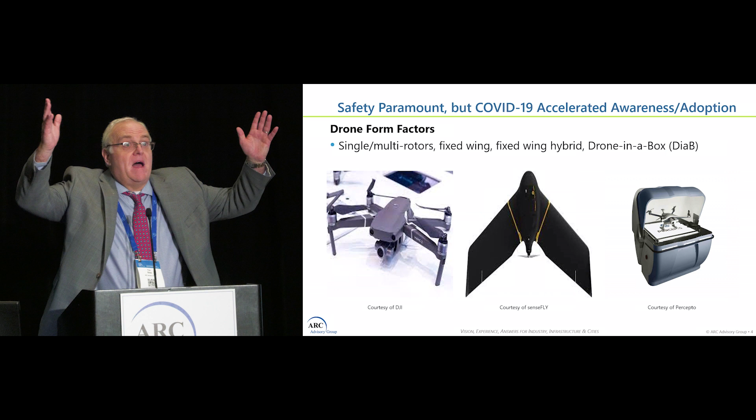Since the focus here is on drones, these are some examples of the different types. You've got the predominant share of the market, based on our research, which is the multi-rotor type drone on the left. Then there's your fixed wing one in the middle, and a growing area of interest is these drone-in-the-box solutions operated autonomously. You see the enclosure - it's usually weather-proof, has a charging setup inside, and communications capabilities. It opens up, the drone flies a pre-programmed mission, returns, and most can self-charge and prepare for the next mission.

I think that's going to be a real growth area, because with advancements in autonomous technologies that may be used for vehicles, we're going to see a lot of activity. The drone is really becoming a mobile inspection platform - same with robotics - because you're adding intelligence analytics, whether edge or cloud computing or both. That's where I think the future is going to be.

In many cases the drone will perhaps serve as an advisor, but we have the great crew change going on in the various process industries. So if companies are challenged to find personnel, these technologies will be able to replace them. But the number one driver, as I mentioned, is safety - not having someone go into a nuclear power plant or electrified substation area, or climb a 300-foot flare stack. So those are the applications where we see this: remote locations, emergency response for electric power providers. COVID kind of accelerated this whole push towards remote operations, and increasingly companies are looking at autonomous operations, and I think drones and robotics will play a role.

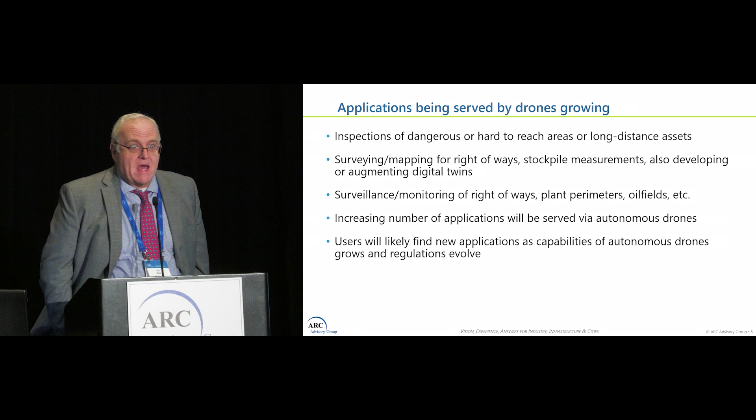Applications, as I mentioned, the hard to reach or dangerous type applications are the initial drivers of people investing in drones and robotics. But some of the major applications you'll see are inspections. It could be thermal, on a utility line or something like that. It could be surveying, mapping, inspections of going around perhaps a refinery or an offshore platform, doing various inspections. Those are some of the key applications we're going to see.

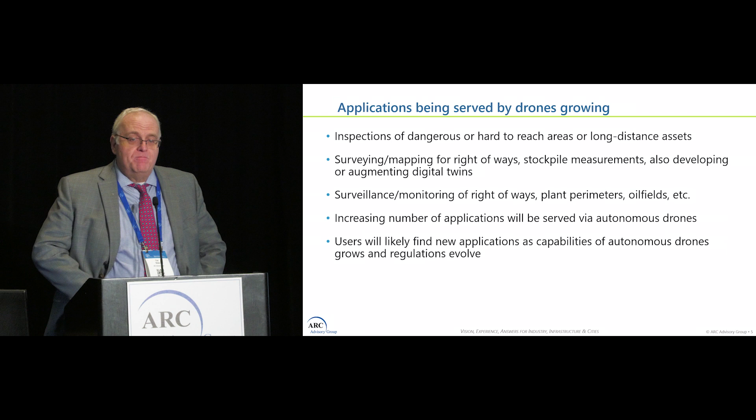Stockpile measurement and mining and things like that. And obviously, using these tools to develop things like digital twins. I think you can go out and use these drones to create a digital twin of an offshore platform or whatever the case may be. I think that's going to be an area where we're going to see a lot of interest and demand for that type of technology.

I think as adoption increases, the two major hindrances are battery technology primarily, and regulatory aspects that the FAA and other countries have with their own respective avionic regulatory aspects. We're seeing some progress with the FAA. They move slower than most people would like, but they're moving towards companies trying to push for type certifications. If you're familiar with the drone situation, you've got visual line of sight, which requires you to always be in visual contact with the drone.

You may have to have spotters either on the ground or in planes, or beyond visual line of sight, where you can fly beyond the visual line of sight, but only at certain altitudes. In many cases you have to have an observer or things like that.

So those BVLOS waivers that you apply for - say if the FAA receives 100, my understanding is they've approved less than 4%. And most of those are utilities used for emergency response. BP was an early adopter - they got approval to use these on the North Slope. Of course, there's no one there but moose and bears, so there's not a real threat of these things crashing into human beings.

That's one of the concerns the FAA has - the various regulations around flying at night, flying over people. So they're working together with the suppliers to advance these regulations. And as that happens, I think you'll see greater adoption in the U.S. and other countries across the world.

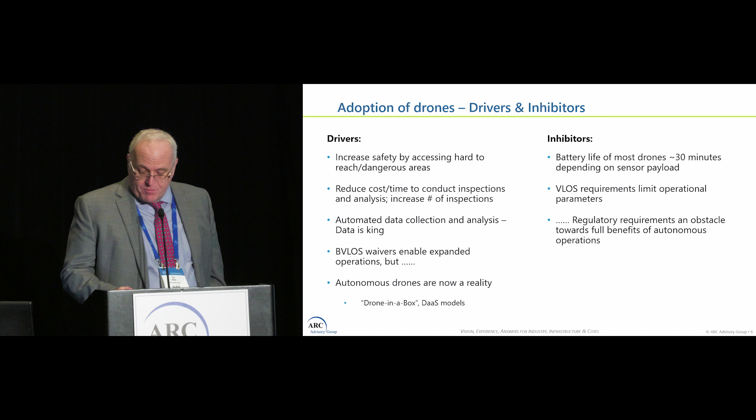Obviously, when we did our research, we tend to be a little more conservative. I've seen a lot of these different studies about the drone market being so big and growing so fast. And I start talking to these guys, and they say, well, where are all these drones? Because I know there's only so many refineries across the world, and then you find out that a lot of these numbers are highly inflated. So when you get down to it, my belief is that there is a drone market out there today, but it's a lot smaller than people think - though I think there's room for opportunity.

I think that's going to be a reflection primarily of less restrictive requirements from FAA and other organizations, opening up the envelope to allow greater mission capabilities. There's also a great crew change happening—a lot of folks with gray heads and domain experience are retiring, and there's a challenge recruiting younger generations. I think drones can help fill that gap.

I expect to see them becoming initially a mobile inspection tool that'll help advise employees, but at some point down the road they may help fill in and mitigate the need for a whole crew. Instead of sending a crew of 5, you can send 1 or 2, and have the drone do most of the heavy lifting in data collection. That'll help with resource allocation challenges.

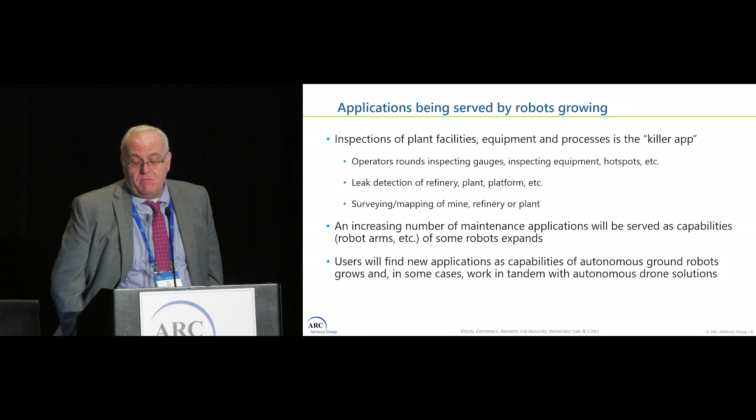As these robots are tested on offshore platforms in various parts of the world, or in other applications, and those are proven out, I'd imagine companies would look for additional areas or applications where these drones and robots could be deployed.

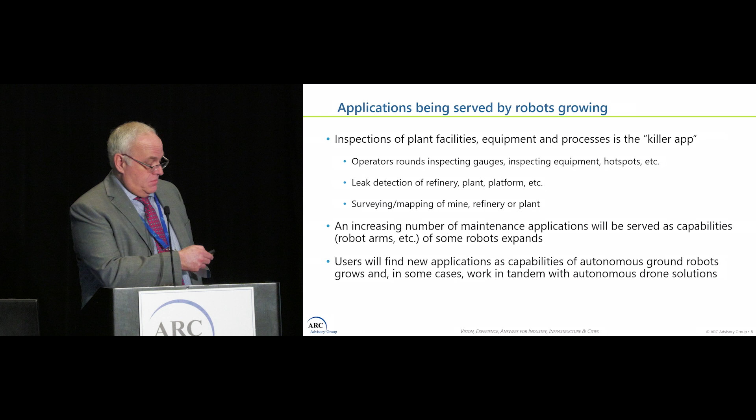So a little more on what I mentioned with Boston Dynamics—there are a couple of companies with a similar quadrupedal look. There's Anybotics out of Switzerland, Unitree in China, and a company called Ghost Robotics, which is actually being sued by Boston Dynamics right now for possible technology infringements. There are also wheeled or tracked devices—there's a company called SMP Robotics that has four wheels and moves around, doing physical perimeter security applications, leak detection, and things like that.

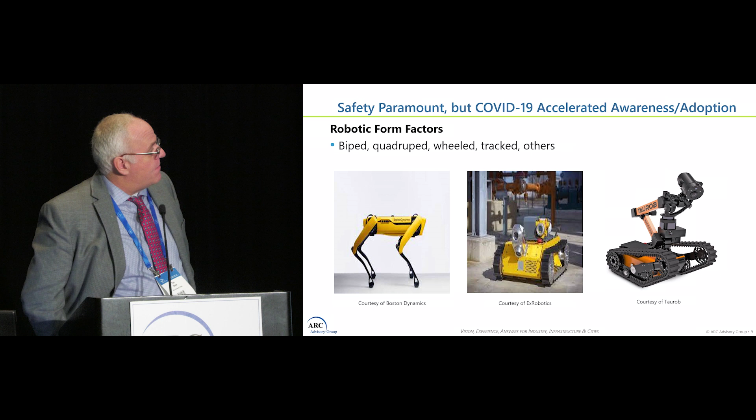I haven't shown the ones that crawl inside a pipe or crawl on the side of a tank or something like that—those are other applications that can be had for these devices.

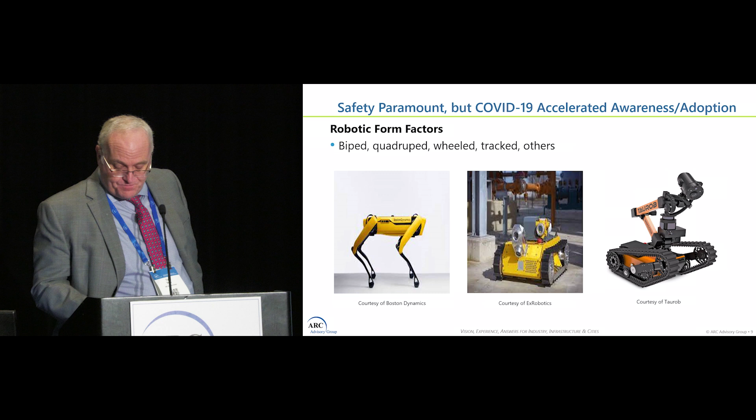A lot of the same drivers are found with robotics as drones. Safety is really the number one driver. You get into the ability to do routine, over and over inspections, so you get good data consistency and quality. The autonomous aspect is interesting - when you talk to the robot guys, they'll say our robot's autonomous, but it's really a guy ten feet away with a joystick directing the robot. So they've been working with some of the drone guys to take technology from the vehicle side, and it's much more autonomous when they have detect and avoid types of technologies, where the robot can really be more autonomous, like we're seeing in drones. That technology sharing is going to go a long way to helping generate adoption.

Some of these, you're looking at Boston Dynamics - if you're not even without any payload, the enterprise version is at least $150,000. If you start throwing sensors on top of that, you're talking $250,000. A lot of companies, unless it's a really critical safety requirement like a nuclear power plant or a highly electrified substation, are more hesitant to just have the robot go around at that price point to do the dials and inspections. So I think they're all working to try to drive the price down, which will certainly help with adoption.

Obviously, like drones, these robots can operate for about 2 hours plus or minus, and they have to come back to base and recharge themselves. So that's obviously a technology inhibitor in a way.

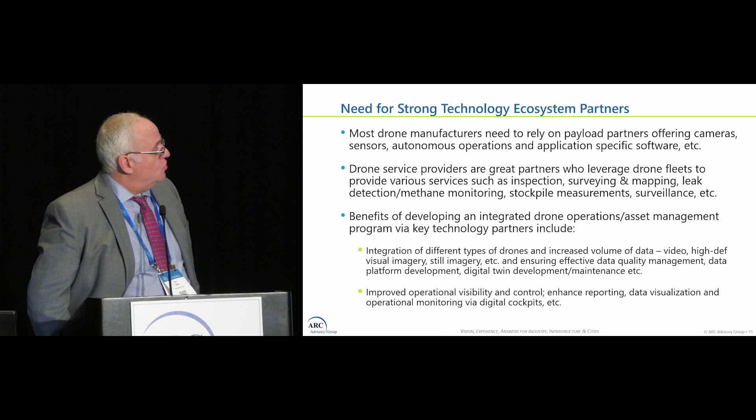So I encourage you to listen to the folks who are going to be presenting here and look at their challenges and any successes they had, and we certainly welcome your questions during the panel discussion.

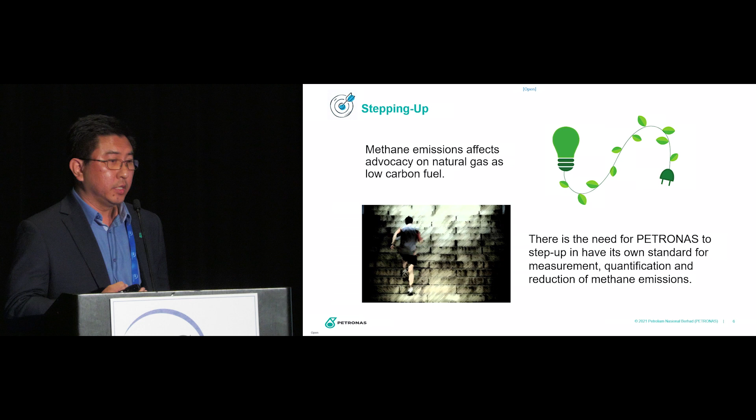Before we get to the drone itself, some information on methane emissions requirements. We want to actually reduce the methane emissions as we rely more on natural gas right now as a fuel. And Petronas has to step up and align our measurements, our quantification with what is in the industry standard.

So we have established 2 documents. These are internal documents, which are our technical standards on methane emissions quantification and reporting. And it is accompanied by this handbook, which is a guideline to the standard on how we will measure the emissions and perform reduction on this. These were recently established, in 2021. And we have started to embark on our activities to actually measure the methane emissions throughout our operations.

So we have a net zero carbon emissions target by 2050, and it's a gradual reduction. In 2024, next year, we want to cap our emissions at 49.5 million metric tons of CO2 equivalent, and within that number, a 50% reduction of methane emissions for our natural gas value chain across our operations. Going on to 2030, another 25% reduction of greenhouse gas emissions, 70% methane reduction, and also 50% methane emission reduction for our natural gas value chain, and reaching net zero in 2050. So that's the target, and that's the setting for the application that we are going to see here on the drone.

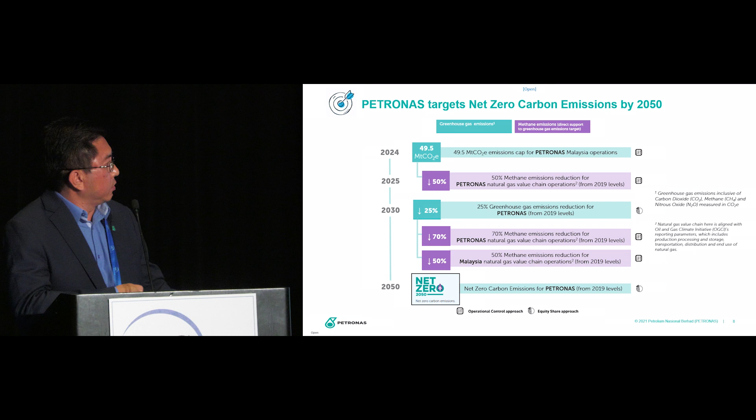With that target, we also have two strategies, two actions towards reaching net zero. We have to reduce the greenhouse gas emissions, and this is through operational emissions reductions. So we are looking into how to reduce our flaring, electrification of our energy generation, energy efficiency, and also carbon capture and storage. So there's a lot of activities in this area to reduce our emissions.

And we're also looking at business growth in cleaner and green energy solutions. So we have a separate entity that's looking at this, looking at hydrogen, supply of hydrogen, and generating green hydrogen, renewables, and also mobility, as well as biofuels. So this is all in line with our target to reach net zero by 2050.

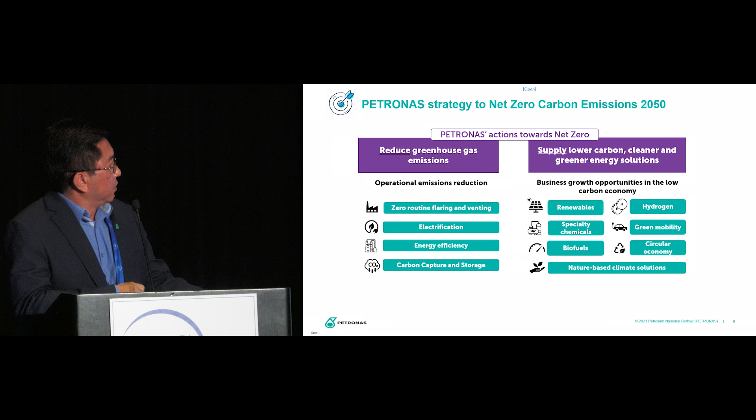So in order to measure the emissions, we need to have a guideline on what we need to do. The quantification approach that we have is written in our standards, and this is aligned with the oil and gas methane framework, the OGMP, which is a coalition of over 80 companies and institutions that set up a guideline on how we are going to achieve methane reduction, how we are going to measure, quantify, and achieve reduction. Petronas is one of the members of that alliance.

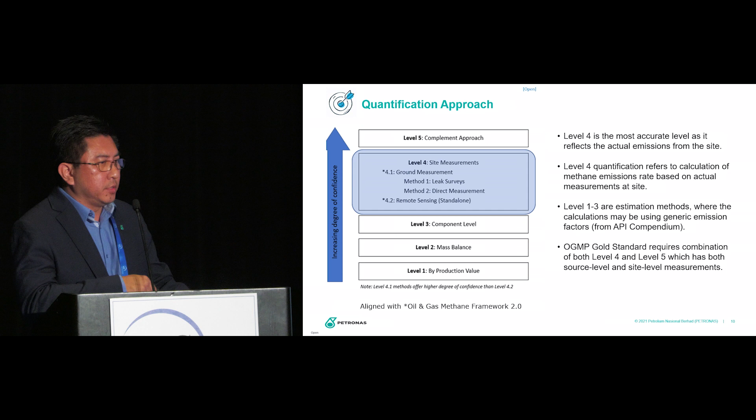So what we do here is quantify the different levels of measurement. Level 1, 2, and 3 are basically by estimation, by calculations, so it's qualitative calculations. Level 4 is site measurements, where we actually do site measurements of the methane emissions at the ground, and also using remote sensing through drones, so that we can get the actual measurements. And level 5 is a combination of source level, which is level 4 at the ground itself, and site level, meaning site-wide measurement of the emissions.

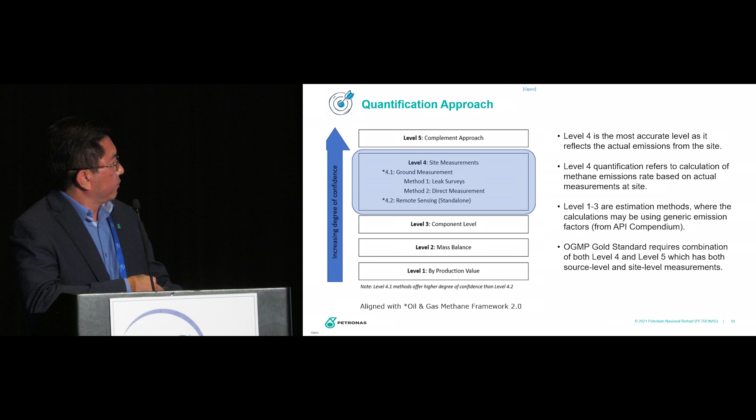So if you look at level 4 and level 5, what are the technologies that we are using to measure these emissions? Level 4 is basically the typical technology that we have, IR camera and portable FID detectors. These are already there in the plant, but we have not actually put them to use at the emission leak points at the moment. So that's the next step that we need to do, and that's level 4. That's pretty easy, pretty basic.

So if you go to level 5, these are where the more advanced technology comes in. For example, the QOGI hyperspectral camera, which can be fixed, portable, or even mounted on the drone to look at the emissions. We also can use a methane sensor using LiDAR or TDLS, tunable diode laser spectroscopy technology, which can be used to measure the methane as well. And also, lastly, satellite imaging. All this will provide site-wide methane emissions identification.

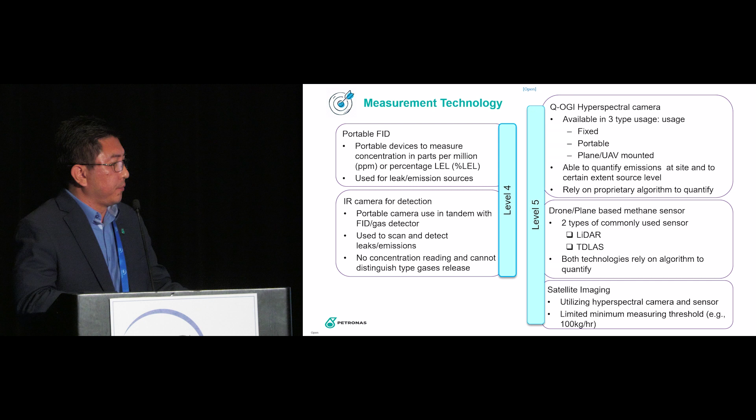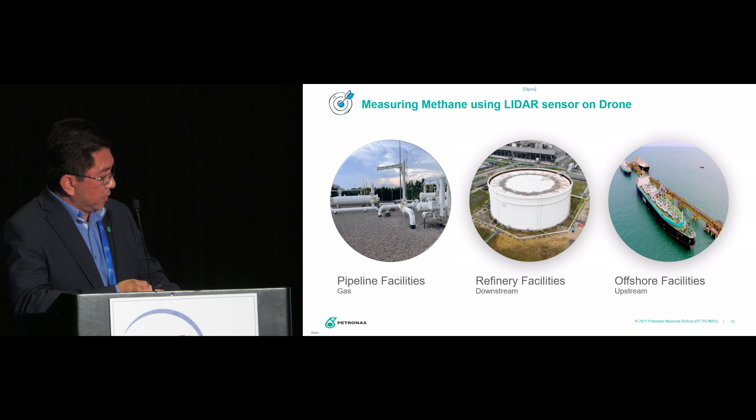So the application we see here for the drone is using the LiDAR sensor to measure methane. We've looked at 3 different areas of our operations to see whether we can detect emissions on the sites: pipeline facilities, which is mainly pipelines with some interfacing facilities, the refinery, which represents the downstream facilities, and we also tried it out on an offshore platform.

These are the 3 facilities we've looked at. For the gas pipeline facilities, you can see the drone can actually detect there's emission here and at this point. If you look at the ground, it's actually true - these 2 are venting points of the gas pipelines. So the results are consistent.

The readings are consistent, but the wind speed is a factor during measurements. If you have a lot of wind, the reading will not be as accurate, and you need to input the wind measurement, the wind value, into the algorithm so that it can detect properly.

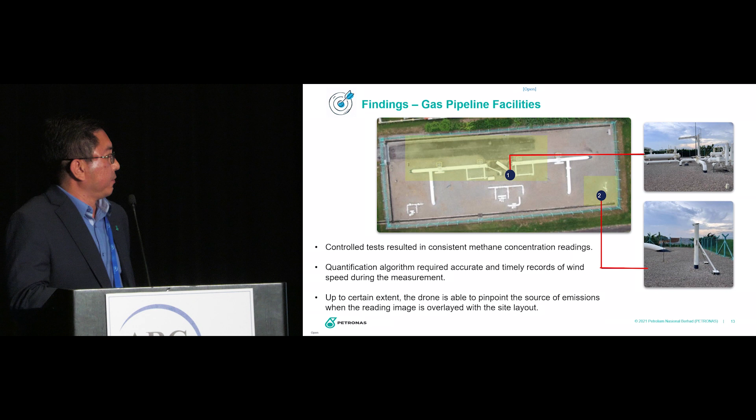If we map the drone's output reading of images onto the layout of the site, you can see the area where it says there are emissions. So you can actually look at this and see the actual point of emissions. It is measuring and identifying it correctly, but the accuracy will need to be improved, of course. That's for the gas pipeline facilities, or onshore facilities.

If we look at the offshore facilities, we are scanning this offshore platform. When we scan it, it is unable to pinpoint the source - it's only able to roughly estimate the area. The main reason for this is you have the water here. The water absorbs the energy, so your reading is affected quite greatly.

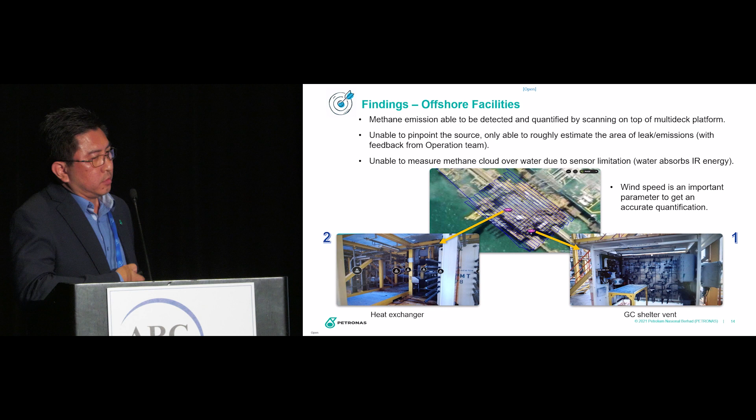But it is able to show some emissions here as well. When we go to the sites, you can see these are points of emissions - the gas chromatography venting, and also the heat exchanger. So it can detect, but quantification is a bit difficult because of the area there. The water is interfering, and also the wind - it's more windy out offshore, so that certainly affects the reading.

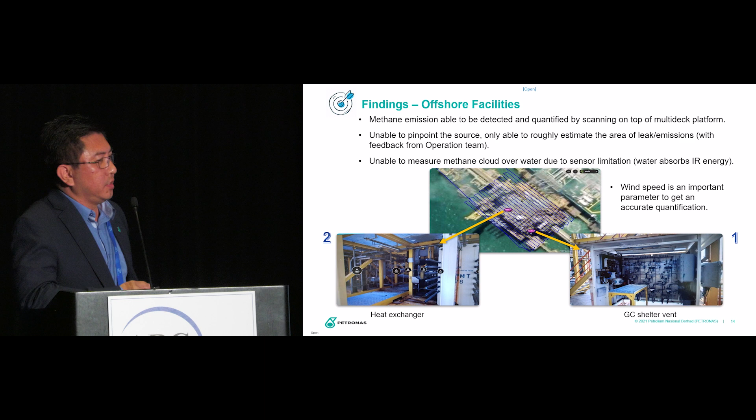So that's the application we have for methane. The second use case is using drones for virtual fencing and encroachment detection. We have gas pipelines running all over Malaysia, and those pipelines have what you call right-of-ways, paths where you cannot enter without permission.

There are a lot of cases where people enter and basically dig here and there trying to steal some infrastructure, and because it's very remote, it's very difficult to enforce. So the idea is to use a drone to actually enforce this.

An example of this: this is the pipeline right-of-way. You have the pipeline here, and sometimes you have stations for all the instrumentation, the SCADA system. You also have a fiber optic that runs along the pipeline, right, and this fiber optic is used for data transmission.

It's also used to detect vibration on the areas surrounding the pipeline. Vibrations or pressure actually change the waveform of the light, and if you put a detector at the end, you can detect this variance and pinpoint the location where these changes happen. So we use that to detect the area of intrusion.

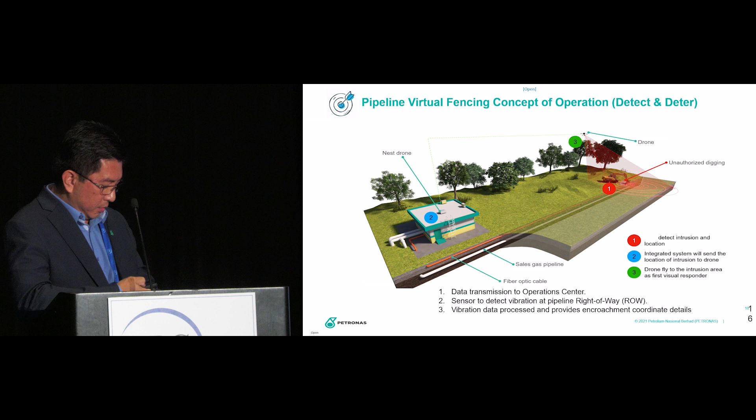So we have implemented, I think, 3 of this in a pilot. So far it's working good.

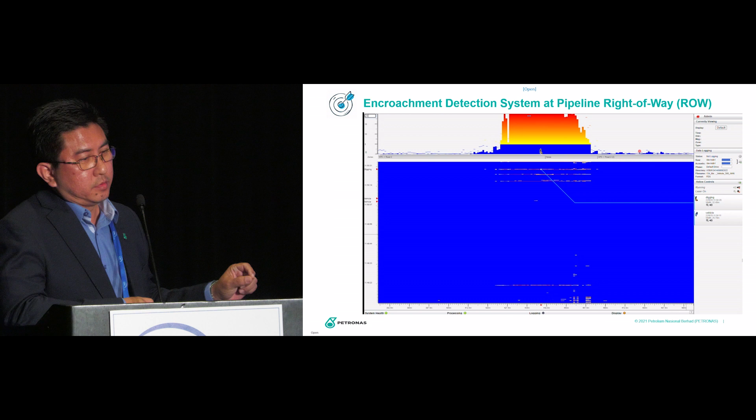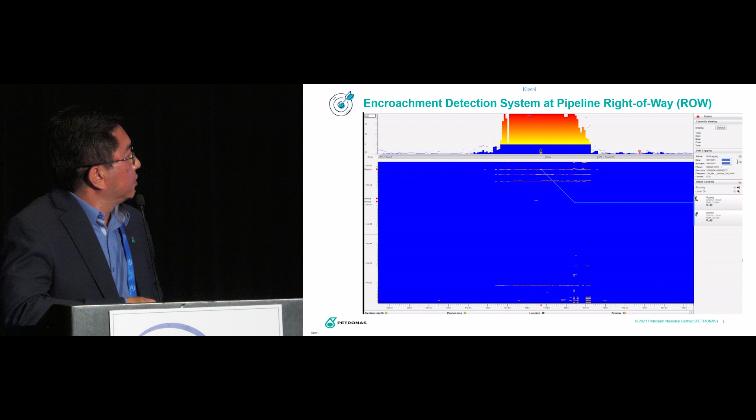Okay, this is just an example of the detection system from the fiber optic. So if you can see there's an intrusion, you see a large variance here, a high reading here. And this will actually show you even the type of activities there from this spectrum. Here you can see digging, and here is something else, I can't see it.

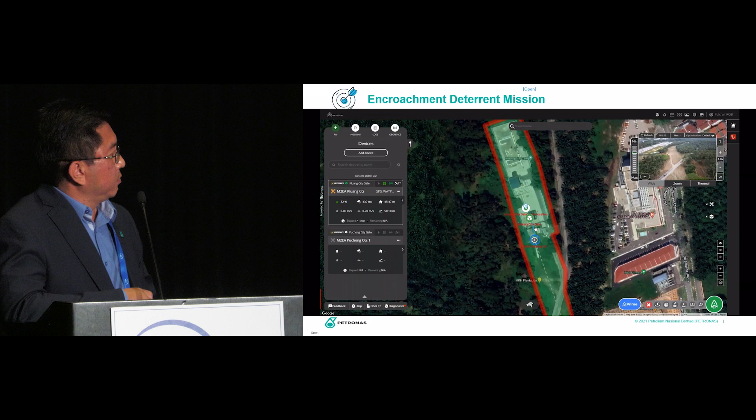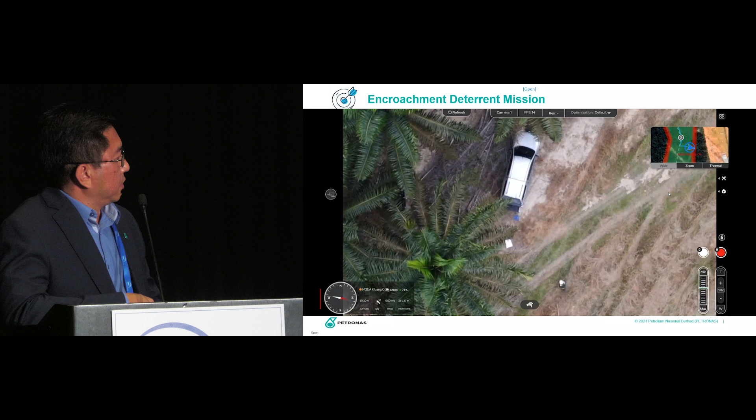The path is set by the system directly to the coordinates where the intrusion is happening. The drone is flying between the two lines, so it's guided by the boundary of the pipeline. It cannot fly over that. You can see here the guy is actually doing something, right? And he panics and runs away because the drone is sending a very large alarm to him, though you can't hear it here.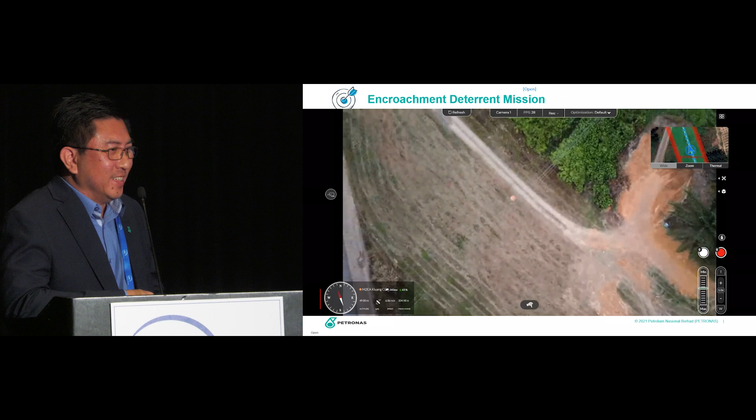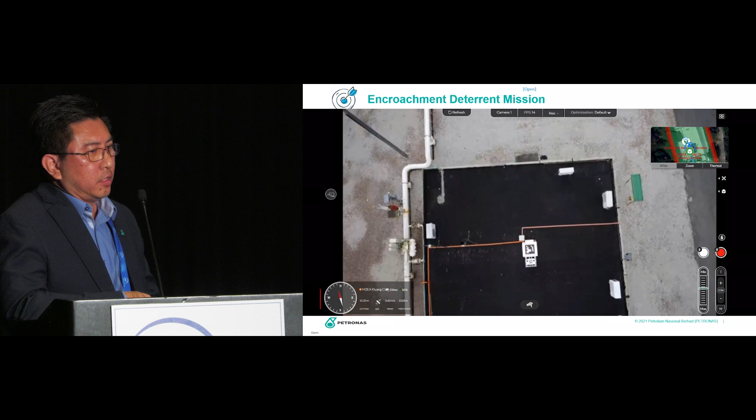And then the drone will fly back to its nest automatically. So these are all done automatically. There are cases where the operator can actually take over if there are some issues.

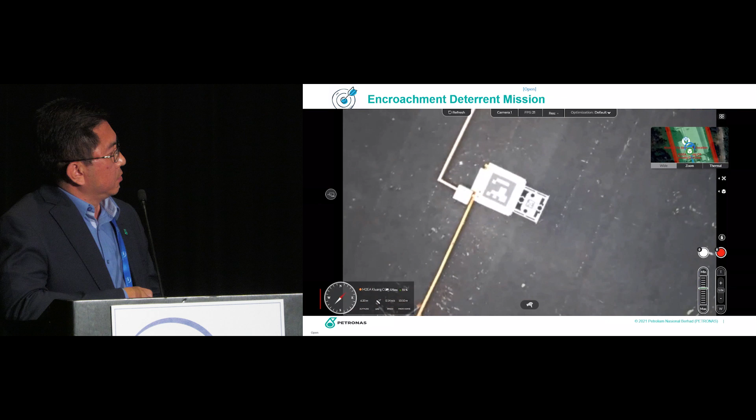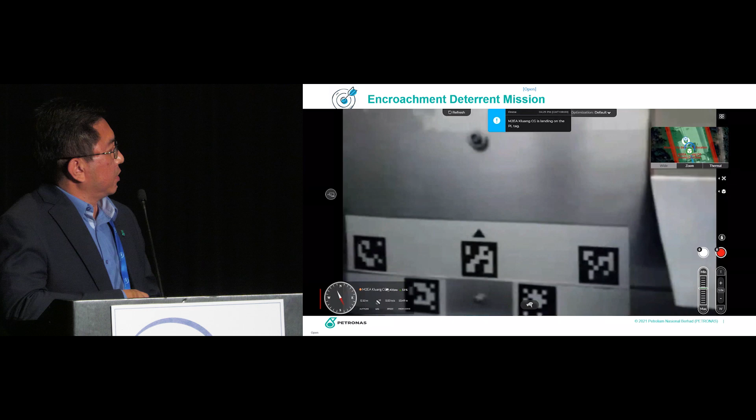That's the box, the shelf that is open, so the drone will land there. Now it's trying to land, then it's landed, right? And the box will close and the drone will recharge itself. So that's an example of the intrusion detection and intrusion enforcement that we have for the drone.

Okay, so I think I'll pass over to my colleague Shuko for this third use case.

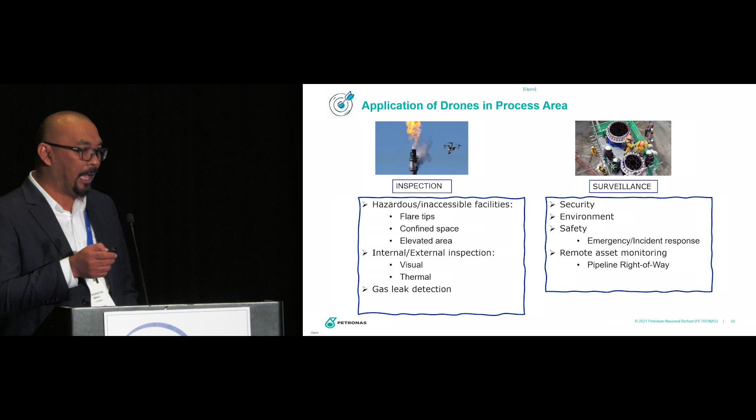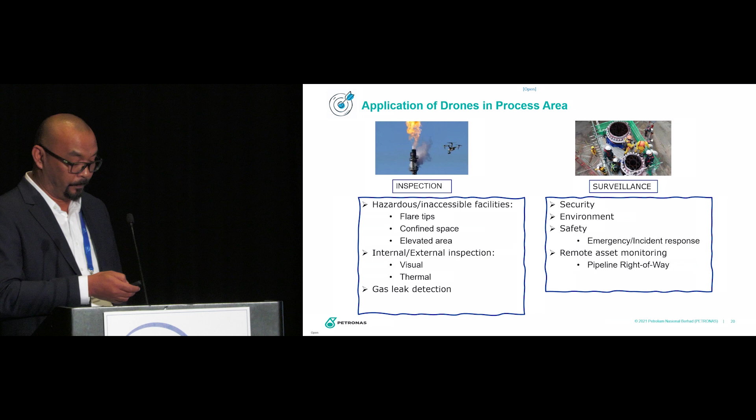Like use case number 2 that my colleague mentioned about the pipeline right of way just now. Before I move forward, maybe some of you are not familiar with what hazardous area means for the process facility. So a hazardous area is defined as a 3D area in which a flammable atmosphere may be expected to be present in normal operation. So when you see some colors, it means that area potentially has some presence of hydrocarbons.

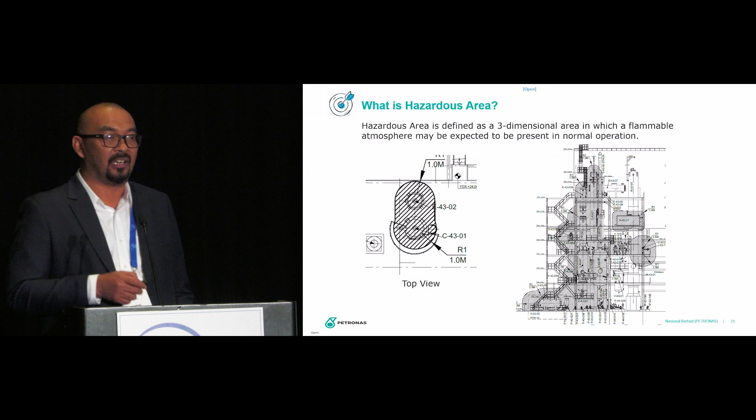So this is where we need to have a drone that is explosion proof—at this moment, our unit that we have in Petronas is non-explosion proof. So this is for the platforms. Just imagine the platform, the whole platform area is a hazardous area. So we need to send our unit that is explosion proof, because we want to prevent our drone from becoming an ignition source.

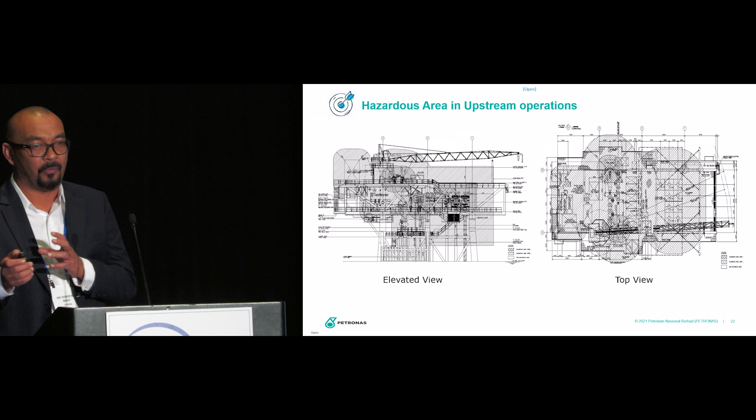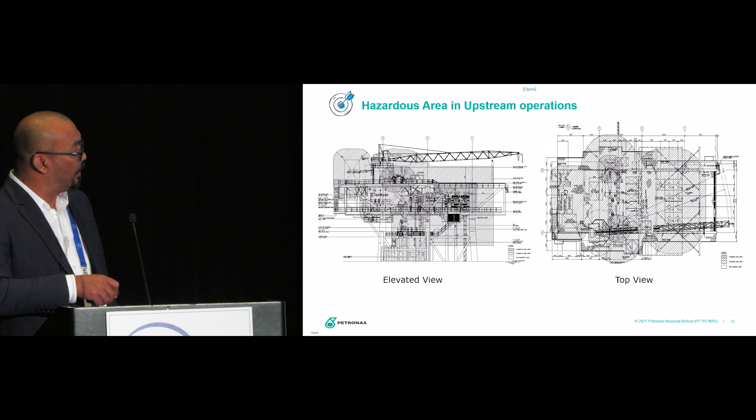We have so many cases already in our facility where ignition sources come from non-explosion proof equipment, especially our lightings and switches. So we try to improve our facility as well. This is the elevated view. We have a cellar deck up to the main deck. All the platform is hazardous areas.

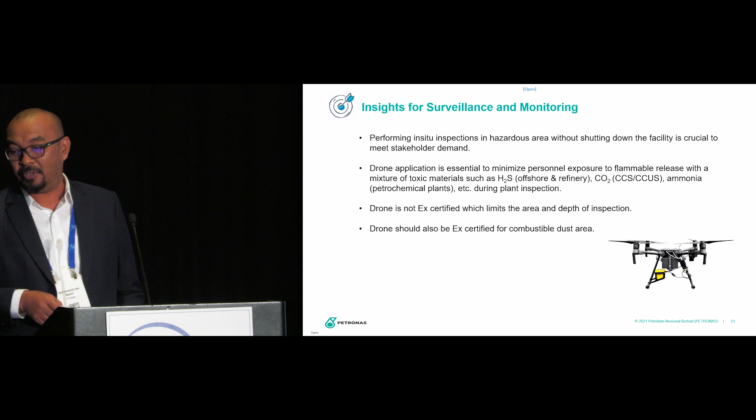Performing the in-situ inspection in hazardous area without shutting down the facility is crucial to meet our stakeholder demand. If you have a unit that is non-explosion proof or not ATEX certified or EX certified, we have to shut down our facilities. Otherwise, it will be dangerous to our people, dangerous to our asset, and our reputation as well.

Drone application is essential to minimize personnel exposure to flammable release with a mixture of toxic material. This is very dangerous, for example in upstream facilities we have H2S - it's a dangerous substance. In our new business we have carbon capture facilities with CO2. In petrochemical plants we have ammonia, which is also very toxic material. So the equipment, the drone, must be ATEX certified or EX certified.

If the drone is not EX certified or ATEX certified, that limits the area and depth of inspection. That's the first thing that we're facing right now. The drone also should be EX certified.

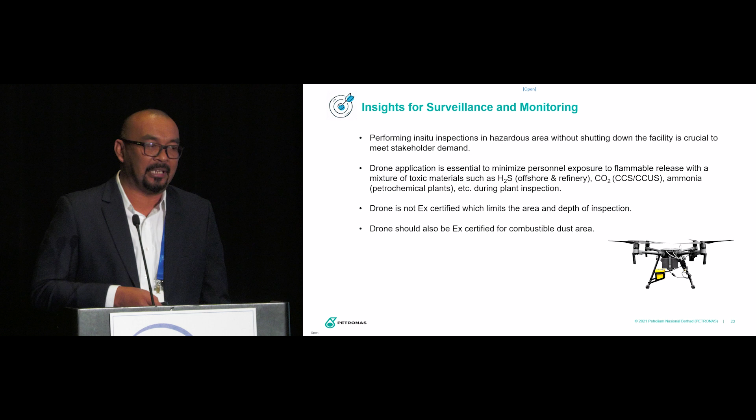We want this unit to be able to enter our combustible areas. We have a facility that produces powder - these are combustible areas, combustible material. It can explode also. In the States we already had some incidents with sugar refining facilities because of this dust combustible area.

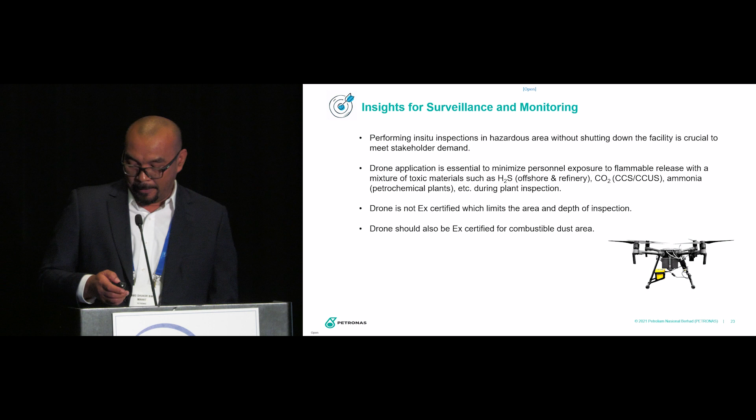All right, I pass back to my colleague.

In Petronas, we have a Petronas Drone Center. This group of people manages all of Petronas's requirements for drone services. We deal with the regulatory authorities, get the permits, and ensure safety of the operation of the drones, so that it's liaised through one body from Petronas. That's what we're trying to achieve here. We hope the drones can improve and we can further utilize them in more applications.

We also do have robots in Petronas. We have the four-legged robot that's already EX certified, I believe - like the animal, I don't recall the name - and we use it on one of our platforms to go around and check the operations of the facilities.

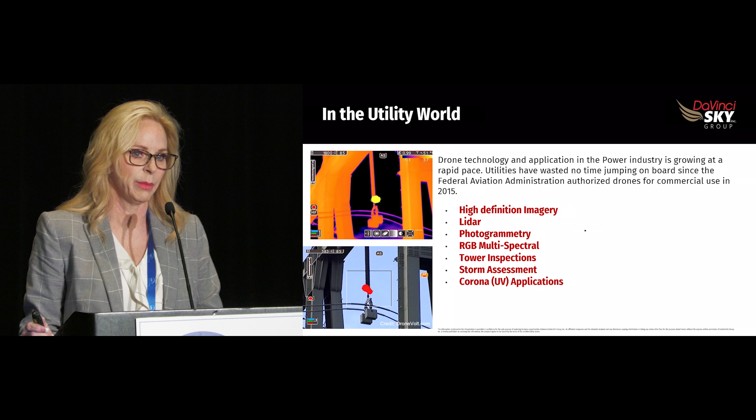So I would like to see a little bit more around FEMA, the storm assessment area. I would like to see some fencing in of certain standards before we just go headfirst into the power sector. And there are places where we just can't go, right? We just cannot go to Land Bureau restricted areas.

You guys, I tell this story - I was so excited. This was when I was in sales before I owned a company, and I got this huge contract with El Paso. It was my first real inspection with helicopters, a little bit of drone activity. We were doing IR, some corona, some high definition imagery, and it was kind of the bomb, right? Well, I didn't realize that I had 7 entities that I needed to communicate with, one of which was Ted Turner's Buffalo Ranch, and then I had a missile site that I got in trouble with. Despite my sales background, I did not realize they were that strict. I just thought, I'm out here doing you a favor - oh no.

So I learned real quick, compliance is everything, right? Compliance translates into getting paid. So I learned that, and then I was off to the races.

Indian burial grounds and other protected areas out in SoCal, Edison - the valley wasn't deep enough to bring a fixed wing plane in to get the vegetation scale, to get all the measurements we needed on this power line that was from 1930. So we were working around all these perimeters, and drones had just really come onto the market. Sure enough, we were able to go to their PUC and get some clearance to go in and take a look, but we were only allowed so many steps and had to walk on the outside. So there are places where drones cannot be without permission from a PUC, and Indian burial grounds is one of them.

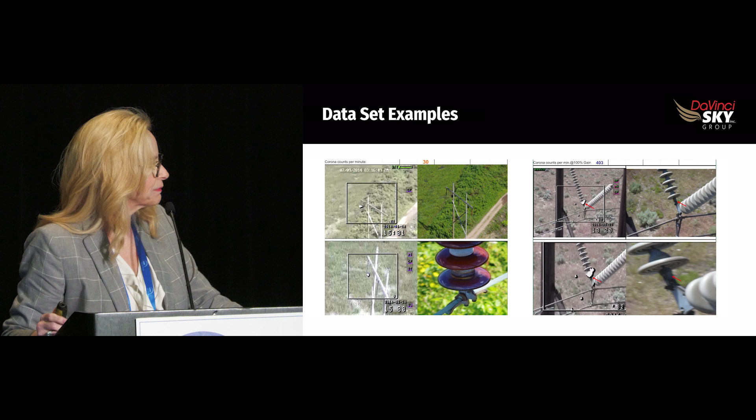Here's another data set. One of the things that happens is sometimes you end up in places you never thought you'd go. Well, this is one of them, and we ended up doing LNG tanks. I never knew there was a need to measure that vapor barrier with LNG tanks. This is up at BG&E, and you can definitely tell where there's leaks. There were just all different types of things we were able to see with that vapor barrier.

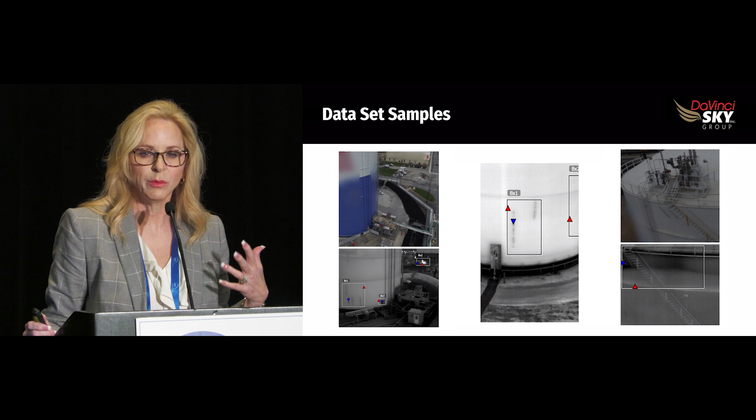Uses in storms - I've kind of covered that a little, natural disaster, storm damage, trees. We have got to get to where the environment is a part of the power grid. It took me a long time to get to that.

I've been in transmission since I was 30. Back then, we had data asset management, but we didn't call it that. It was like, 'get this stuff organized so we can see what we're dealing with.' That's what we called it. That's how long ago that was.

Now we call it data asset management, but we've got to get to the point where when we're looking at and storing the data we're getting from all these different types of drones - I love the deterrent drone, I've got ideas for that - we've somehow got to organize this data. We can't get so inundated with data that you're not using it, spending 6 or 7 months organizing it, and then using it for 3 minutes to make decisions about a project.

When you're going to fly that drone, whether over a pipeline, a roof, a power grid or a substation, compressor station, whatever you're using it for, make sure you're communicating with other departments. Hey, we're going to have a drone out there, what do you need to see? So that you're not repeating work that's already being done and you can get it in one run. Because you're going to pay a minimum no matter what for drone services - if they're out there for an hour, you're going to pay a minimum of 3 hours. So make sure you're talking among your departments.